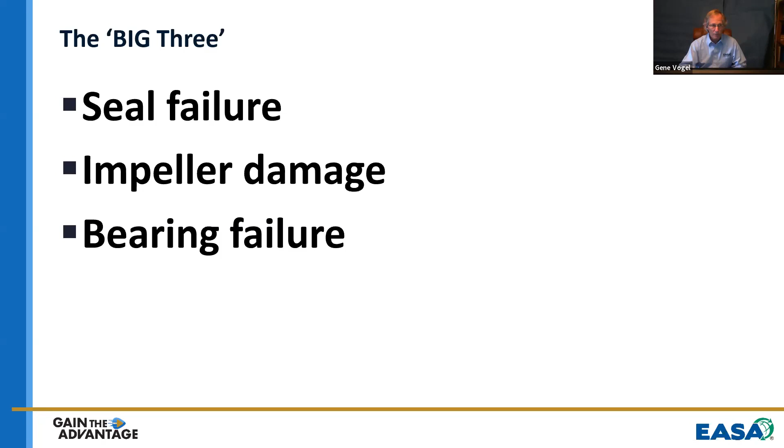I'm going to take somewhat of an outlined approach to this, giving it a categorical, methodical approach, which should make it clear for those who are new and for those who've seen this before in bits and pieces. The first one we're going to talk about is mechanical seals.

A mechanical seal is a fairly simple device. Let me illustrate this for you. I'll hold this up to the camera so you can see it. Here's the mechanical seal: you've got a stationary element and a rotating element, and each of them has a precision face which mate together. The stationary element stays still, the rotating one rotates, and a spring applies pressure. Pretty simple concept.

Here's this, if you took this seal and cut it in half, you'd want to go back to the presentation. You need to share your screen again. Did I stop sharing it? I stopped it for you. Thank you. Share screen, and share. There we go.

Back online. So if you took that seal and cut it right in half, you've got kind of a diagram here. And I want to illustrate, if you want to understand how seals fail, it's important to understand how seals work. There are the primary seal and secondary seals. The primary seal is where those two faces rub against each other. The secondary seals are the elastomers that seal the rotating element to the shaft and seal the stationary element to the housing of the pump.

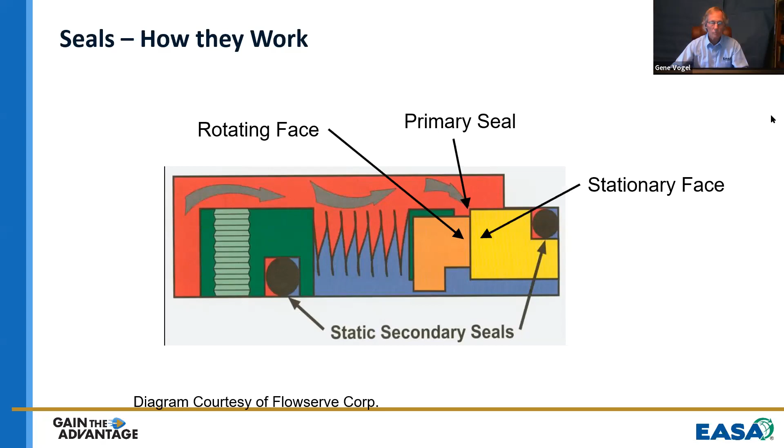The stationary seat right here keeps the pumpage from finding its way out underneath between the shaft and the rotating element, and the stationary element keeps that liquid from finding its way out on that side, and that's your secondary seal.

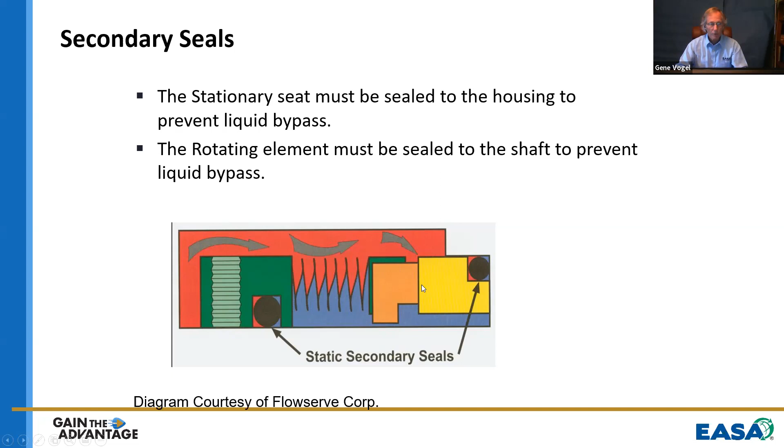Okay, so operation of the seal, there's a couple things that aren't quite so obvious. This is your primary seal, the rotating element right here. This is the rotating element, and it has a precision face. This is a stationary element with a precision face.

There's going to be a very, very tiny, small amount of the pumpage that gets in between those faces, and that's critical. That liquid between those faces significantly reduces the coefficient of friction between them, which reduces the heat generation.

So if you've got a very thin film of pumpage in between those faces and you're rubbing together and generating some heat, some of that's going to vaporize, and there'll be a very, very tiny amount, a few molecules. It's not measurable. You can't smell it. The EPA can come along with a sniffer and they can pick that up, but that's the only way you can tell it. So it's not visible, you can't see it, but it'll be a very small amount.

Now that's an important part of the operation of the seal because it reduces that friction, it reduces the heat that's generated. The other aspect of this is notice that the surface of the rotating element and some of the surface of the stationary element is exposed to the pumpage. The pumpage is actually going to take that heat through convection off of those elements and prevent them from overheating.

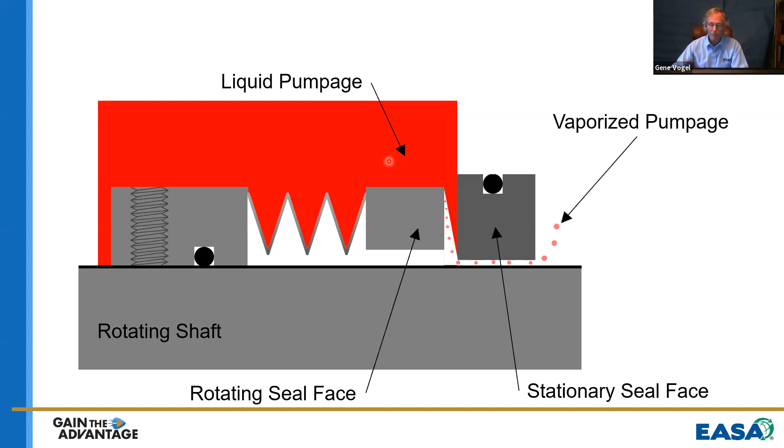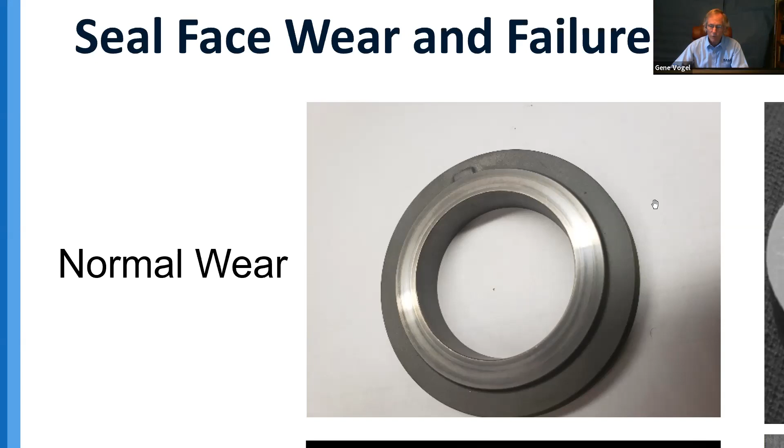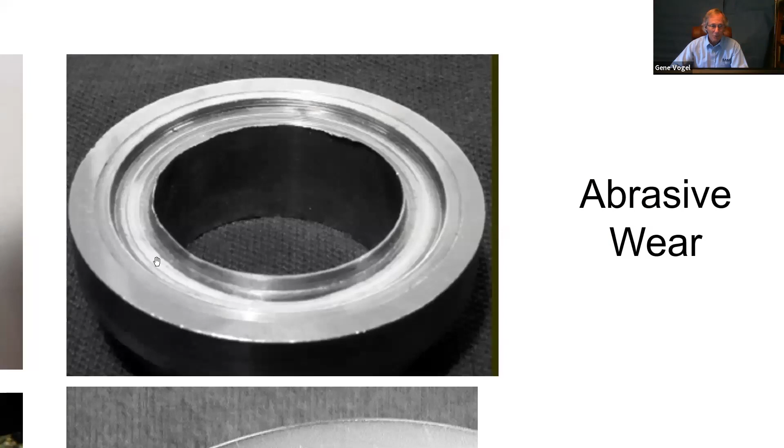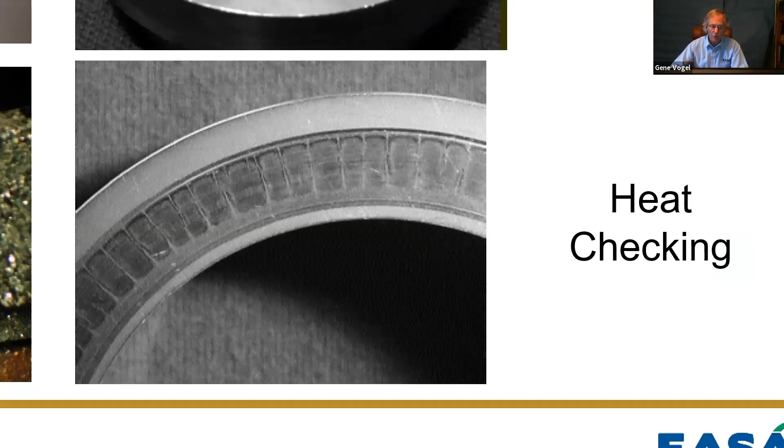And this is what we call heat checking. That's a particular pattern that shows up when a seal has been overheated, particularly if it's been run with too much tension on the spring.

So you can analyze the seal by looking at the seal faces. There's more to it than what I'm showing you here. There's 4 common examples. There's about a half a dozen more that I could show you.

We'll limit that to say that as far as the primary seal, if you have a seal that's leaking, why does it leak? Take a look at the seal faces and see, is there any damage there that would indicate why the seal had leaked? If there's no indication of damage to the seals, it says, gee, the seal looks good.

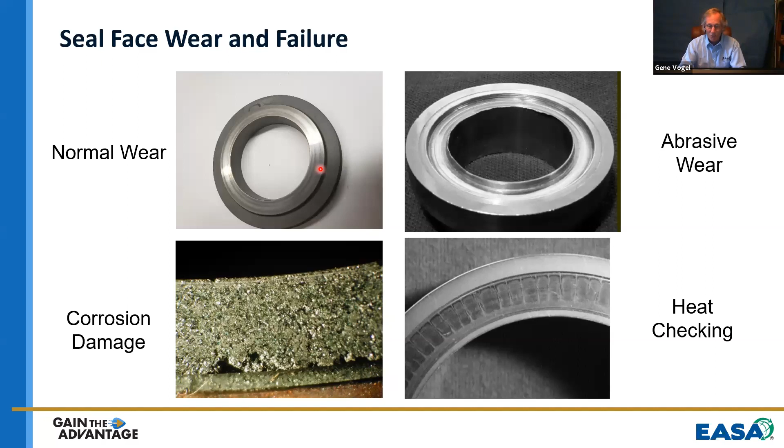I had one member who had changed the seal out 4 times. I said, what do the seals look like? He said, they look great. I said, well, the problem's not the seal. It's somewhere else. One of the other places you look is at the secondary seal.

These are the elastomers that seal, in this case, this is an O-ring that could seal that stationary element into the housing. It might be an O-ring in the rotating element, sealing the rotating section onto the shaft.

A chemical attack, there's something about these O-ring material. It could be just Buna rubber and they're using some sort of solvents in the chemical they're pumping, and it absorbed some of those solvents. This smaller O-ring is the correct size. The larger O-ring should be the same size as the smaller, but it has swelled up and it'll be really spongy and soft. It will not seal. So that's a chemical attack.

Someone damaged this putting it on there. They slid this O-ring up over a shaft where there's a keyway, or over a shoulder in the shaft that had a sharp edge. There's ways you can prevent that from happening. Take a little Mylar paper, wrap it around the shaft to prevent that from happening.

This is the elastomer that seals the rotating element to the shaft, and you can see it's cracked and brittle from being overheated. These are different materials. There's some real expensive stuff out there, Kalrez, that they can make this out of.

There's others that will withstand the heat better. So if the material for the elastomers is not compatible, or it's been mishandled and misinstalled, that secondary seal will fail. So if the faces look good, look at the secondary seal. If the faces look good and the secondary seal looks good, you might want to look elsewhere.

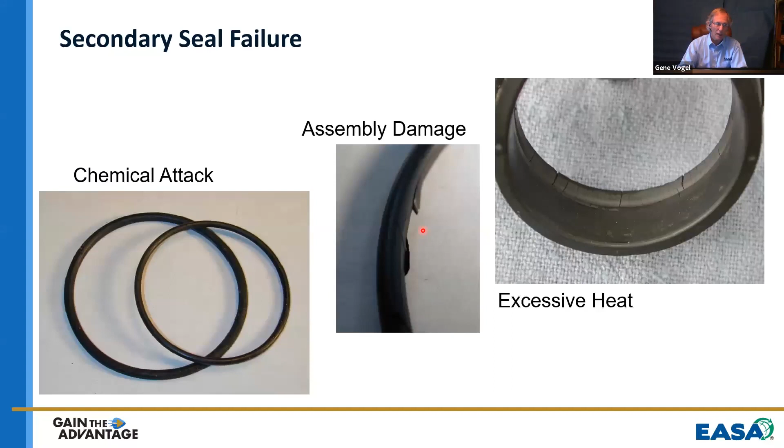The gentleman that I mentioned that had changed the seal out several times, they found there was a leaking valve, and the water was running down the pipe onto the pump and dripping off the bottom of the pump. They changed the seal out 4 times because the valve 3 feet away was leaking. Such are the things we encounter.

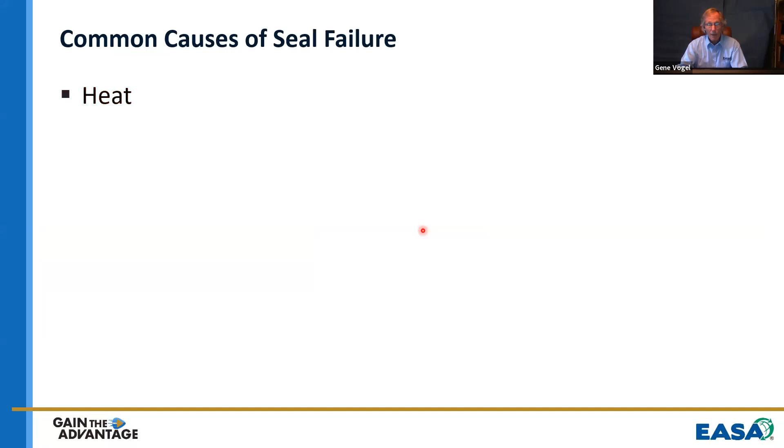So what commonly causes a seal to fail? Heat is a big one. A seal overheats. Abrasive pumpage, or pumping something that's got debris in it, gets between the seal faces—that's another common one. Vibration, improper assembly where it wasn't put together right, or chemical attack. Let's take each of these and break them down a little closer, okay?

The amount of heat that's generated is a function of the surface speed, the amount of force pressing the 2 seal faces together, and the friction coefficient of the face material. So those 3 things. The surface speed in turn is a function of how large the seal is, what's the overall diameter, how much surface area there is as a factor, and the rotating speed.

So if you've got a small seal on, say, a swimming pool pump, it's a 1/2-inch shaft, a 4-pole motor, runs at 1,800 RPM—the speed's not very high. You're not going to generate a lot of heat. That seal is not going to fail because of heat.

But if you've got a larger piece of machinery, maybe an industrial pump with a 3-inch shaft, a 2-pole motor running at 3,600 RPM, that surface speed's going to be a lot higher, with a bit more surface area as well. It's going to generate more heat.

The other thing is the amount of force being applied to those 2 seal faces, pushing them together. You've got to have enough force to keep the liquid from coming out. So if it's a low pressure system, your swimming pool pump for instance, there's not a lot of pressure there. You don't need a lot of tension on the seal faces. Without much tension, you're not going to generate a lot of heat.

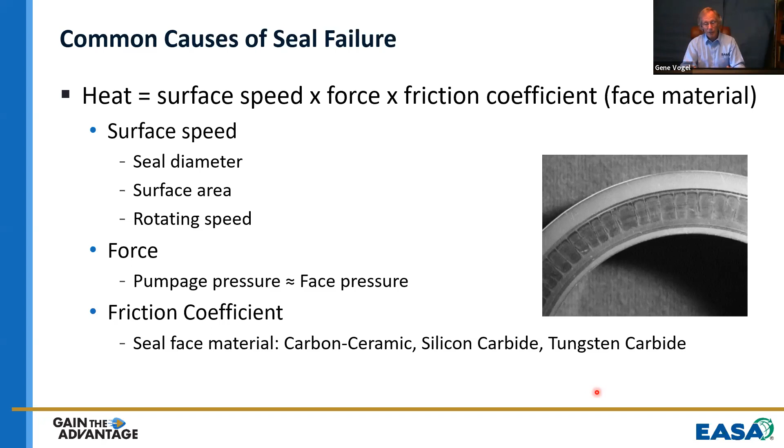The last factor is how much cooling do I have? The liquid, the pumpage, is actually flowing through—a small amount of it flows through the seal chamber and carries away the heat generated by the seal. If my pumpage is cool, like in a swimming pool pump, you're going to have great cooling and no problems.

If the pumpage is hot, a boiler feed water pump pumps condensate—a couple minutes ago that was steam, now it's hot water. You're not going to get as much cooling. Chemical applications in refineries may pump something like hot asphalt at 700 degrees. Not a whole lot of cooling going on there at 700 degrees.

So that's heat. Abrasion is the other thing that damages seal faces. The picture of the seal face here, ground right down into what's supposed to be a flat face, is because of abrasion in the pumpage.

How did I get there? That's what happens when you hit the wrong key. Please bear with me for a second. My end key apparently is right next to my page down key, and I hit the wrong one. There we go. Let's go with pumpage. There we go. Okay.

So the abrasives, suspended solids are the most common. You're pumping sewage, and you think you're pumping water out of a lake or a river, pretty clear, clean water. But there are very tiny particles in there from sand and other fish parts floating around in the water. I know there's fish parts, I've left some behind on occasion. So it gets in between the seal faces and grinds it up.

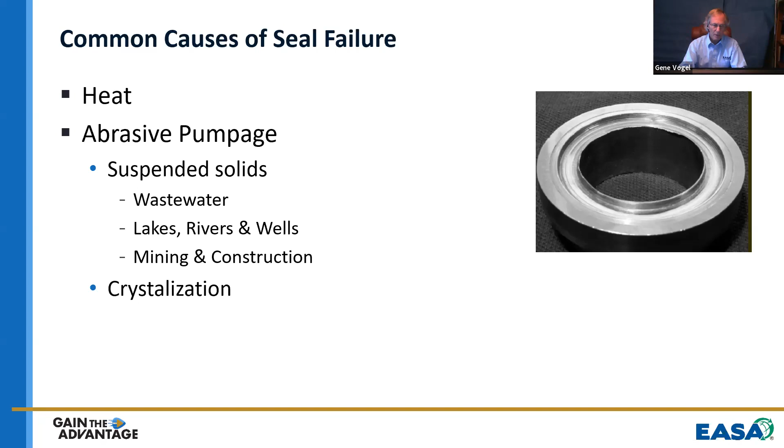Another source of abrasive pumpage is what we call crystallization. There's lots of different applications that have crystallization. I'll focus on one that's simple to understand - salt water. If you're pumping salt water and a small amount gets in between those seal faces, when the pump stops, you've got water and salt. The water evaporates, which means the salt forms a crystal. A crystal of salt is a pretty jagged looking thing, and that's what's in between your seal faces after the water evaporates. Then you start to pump up, and it grinds the faces.

So these are instances where your seal should be designed with something different than a carbon face, because carbon will get chewed up pretty quickly. Lots of other chemical applications can have crystallization.

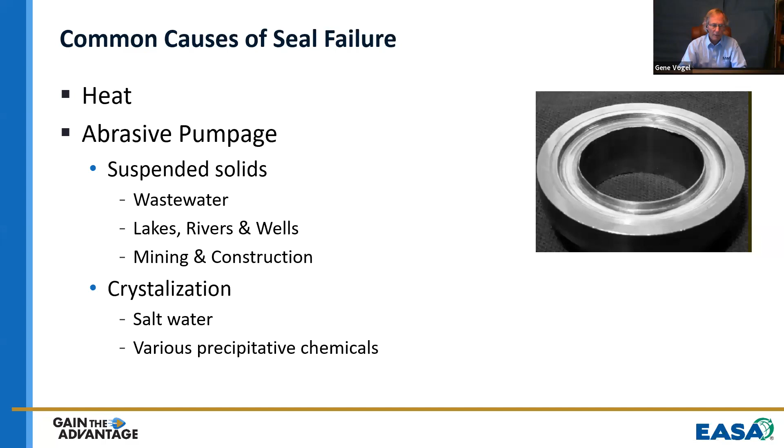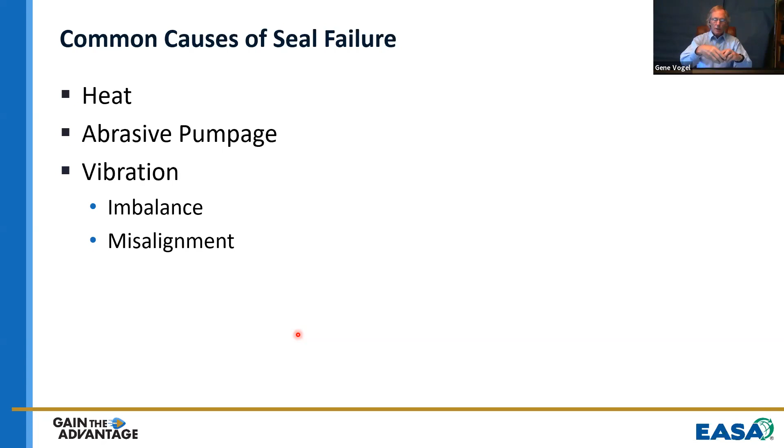Vibration is one of the things that causes seals to leak. The typical things that cause vibration: imbalance - the impeller can be out of balance, the motor could be out of balance, causing the whole thing to shake. Misalignment, not just of the motor with the pump, but also misalignment of the seal parts. If the stationary element of the seal isn't aligned properly with the rotating element, you're going to generate vibration. Cavitation is something that causes problems with seals, and it causes vibration, which causes the problem with the seal.

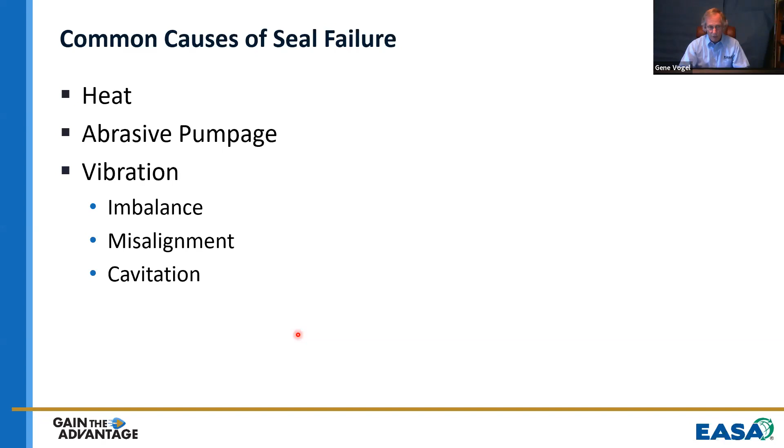We can talk a little bit about cavitation later when we get into impellers, show you a little more about that. So vibration is one of the reasons seals fail. Those seal faces are held together, but when things are vibrating and that seal starts to hop a little bit, the liquid will start blowing through there. One characteristic of a seal failure because of vibration is sometimes they'll stop the machine and restart it, and it'll quit leaking - until the vibration sets that seal off again and blows it open, and it starts leaking again.

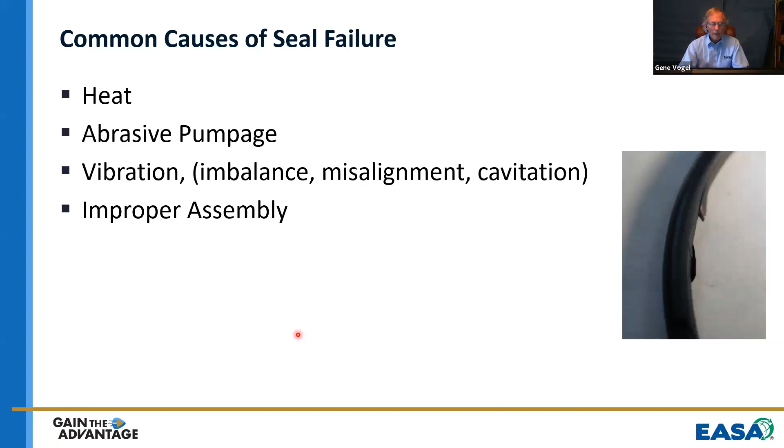Improper assembly - you can do things to a seal when you put it together that just make it fail. We showed you cut edges, sharp edges damaging an elastomer is fairly common. We've seen people slide the rotating element up, and it's got an O-ring inside, and they didn't put any substance on the shaft so it doesn't stick, and the O-ring will actually roll up. It twists up inside of the rotating element, and it won't seal like that.

So when you're installing elastomer parts that need to slide over a shaft or into a housing, one thing you don't want to use is grease, or in some cases oil, because it lubricates between the elastomer and the shaft. And it doesn't go away, it stays there. So now you start it up and the shaft is trying to twist this rotating element up to speed, and the shaft will spin inside of there because of the lubrication, and it'll start to wear and fret the shaft - it'll damage the shaft, okay?

Some of the seal manufacturers make special materials, some lubricants that are water soluble, used for water pump applications. A very good one that's easily available is KY Jelly. KY Jelly is a water-soluble lubricant.

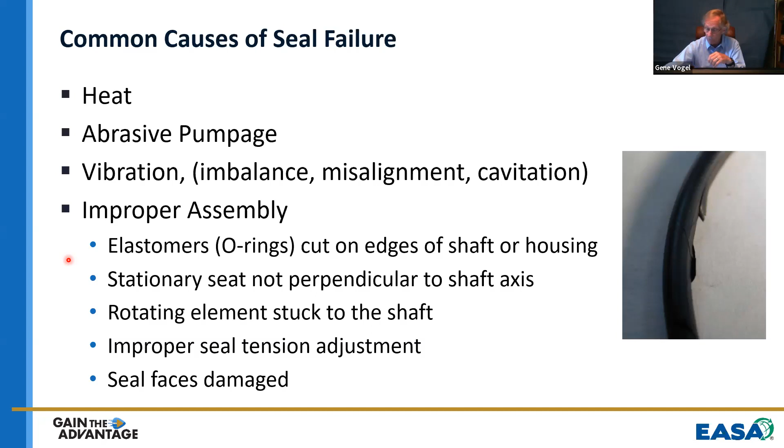And the seal faces can be damaged. These seal faces are very, very smooth, smoother than anything you can put on it in your service center. These are lapped on a lapping machine. A seal supplier who's a value-added seal supplier will likely have a lapping machine. You would never relap a small one like this, you just replace it. But if you've got a 3-inch or 4-inch seal, very expensive, they'll relap those surfaces.

So you need to be careful to preserve that smoothness. Keep the dirt off of them. You don't wipe them off with a shop towel or anything like that. You keep them clean. You can always rinse them off with some water. Okay.

Chemical attack is another common cause of problems - not so common, but it causes problems. And we showed you the instance of the seal face which has been corroded by the pumpage, and the O-ring which has been swelled up because of solvents in the pumpage. Okay.

All right, so that was a really quick run through on seals. Obviously we could spend probably half a day on seals, but to give you a little bit of an introduction of seals and how they fail, and just a couple pointers on how they don't fail.

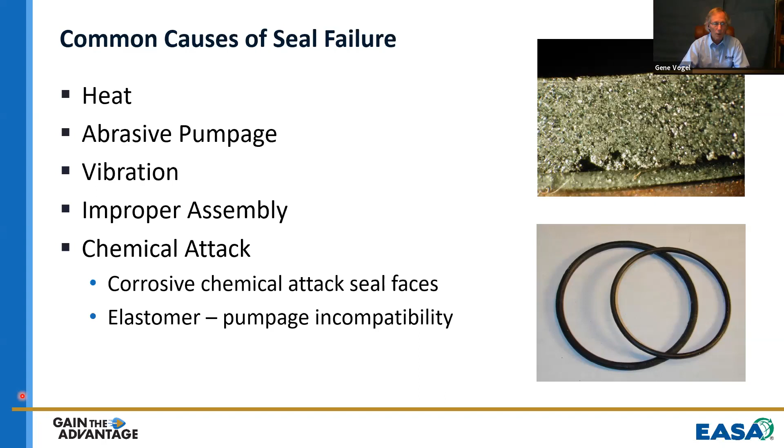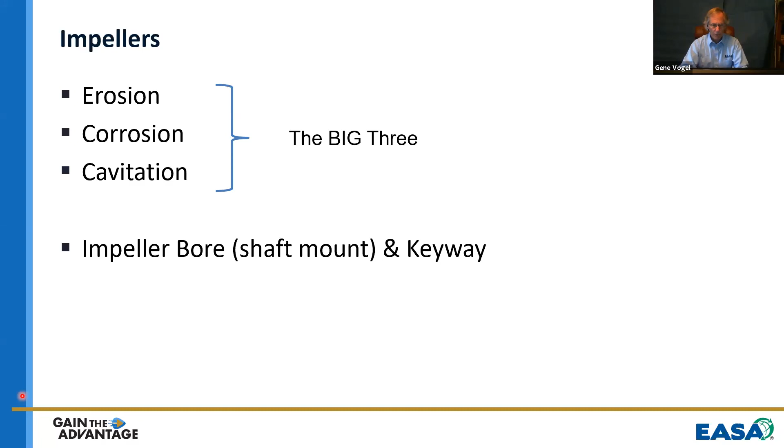Then the second one of the big three for why pumps fail is impellers. And the impeller, you think, God, that's a chunk of metal, how does it fail? Well, the big three on how the impeller fails are erosion, corrosion, and cavitation. And it's important to be able to recognize the difference between those three. The other problem we see with impellers is that they get loose on the shaft. They don't mount on the shaft properly, and the bore gets opened up and gets fretted and worn. So we'll look at those.

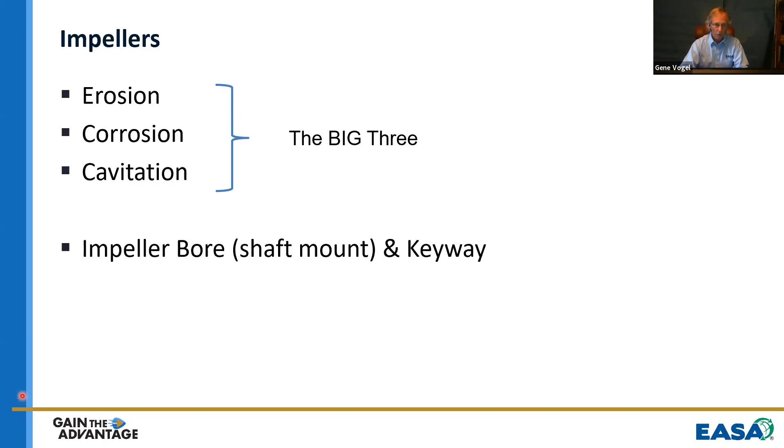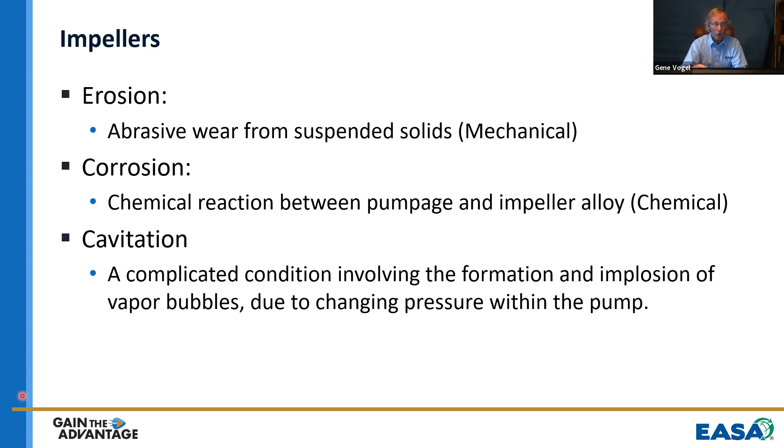Let's take a look at erosion and corrosion and cavitation. Erosion is a mechanical thing - there's something in the pumpage that actually wears against the impeller and sands it off like a piece of sandpaper. Corrosion is different. Corrosion is a chemical reaction between something in the pumpage that ionizes and combines with the molecules that are in the alloy of the metal that constitutes the impeller. Cavitation is erosion, but it's a fairly complex condition that occurs because bubbles form in the suction and then implode. I'll show you an illustration of that. So we need to be able to look at the differences.

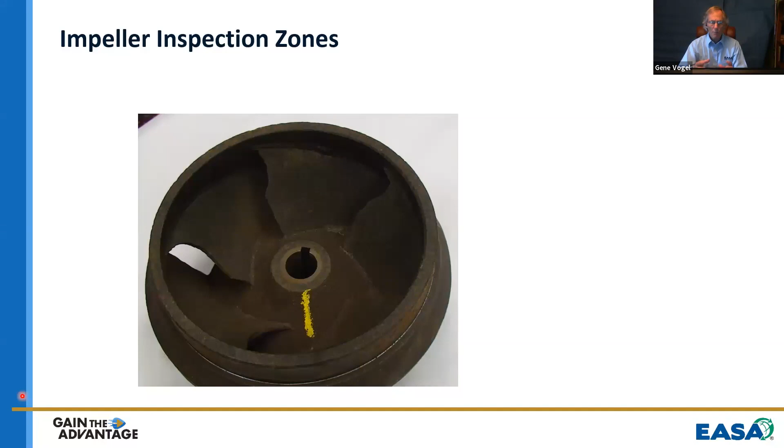To do that, think of the impeller as having different inspection zones - areas where I'm going to look at, specifically focus on, and see what's going on there.

One of them is the suction eye. What's going on in the suction eye of the impeller? And then you have the leading edge of the vanes, that's where they intersect with the liquid, the pumpage, and you can see a lot of what's going on at that point. You've got the vane passageway where the liquid goes from the vane out the back, so that vane passageway is another area that you look at.

You've got the wear ring on the outside that matches up with a wear ring. Not all impellers have that, but if it has one, it's certainly an area we need to pay attention to. It matches up with the casing ring and has a tight clearance. It's a clearance fit, doesn't touch, no wear, not rubbing against it, but it limits the flow from the low suction side of the impeller to the high pressure discharge side.

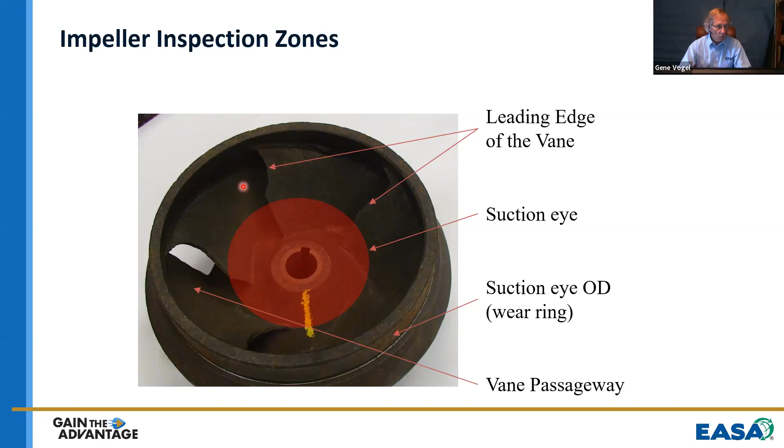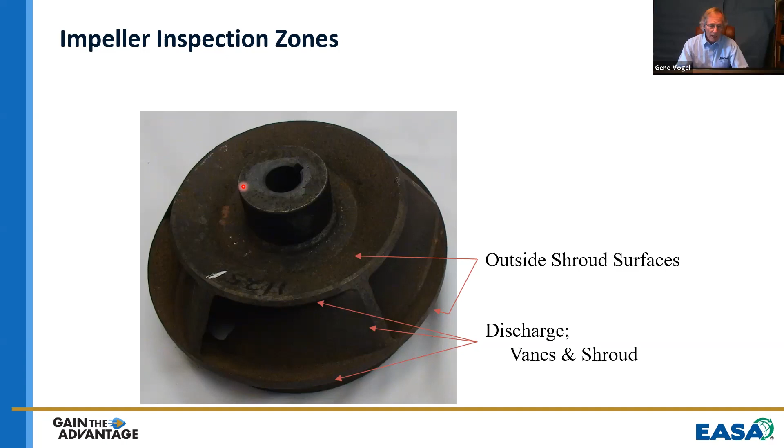Then you flip the impeller over on the back, and you have some inspection zones back here. You want to take a look at the outside shrouds, see if there's any damage. You want to look at the discharge area where the liquid leaves the back of the vane and the insides of the shroud. You've got the bore where the shaft mounts, and you've got the keyway. Those are all inspection zones and places you need to take a look at on the impeller, and that will help you assess what type of damage you have.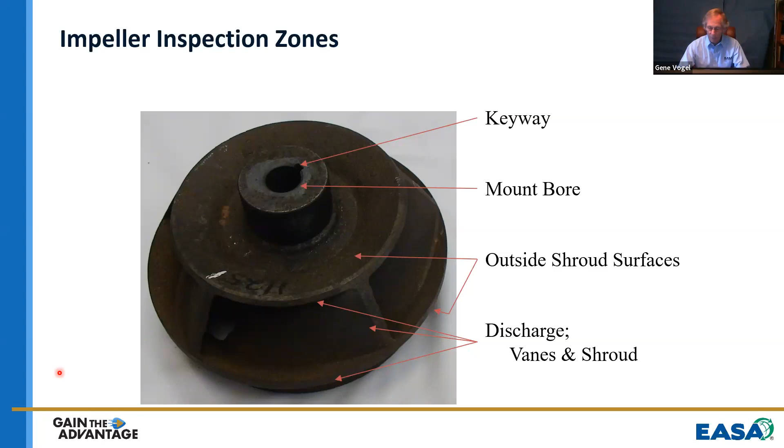Let's take a look at the difference between erosion and corrosion. Erosion is an abrasion, it's a mechanical process, it is not a chemical reaction. Corrosion is a chemical reaction. The erosion is highly affected by the flow velocity.

So if you look at the impeller in the places where the liquid is moving the fastest, at the leading edges of the vanes, across the working edges of the vanes, you're going to see more damage there. In corrosion, it's somewhat affected by the flow velocity because you've got a chemical reaction going on. If you throw more chemicals against the alloy in one particular place than another, you're going to get a little bit more corrosion, but it's not nearly as pronounced as it is with erosion.

Erosion usually affects most of the exposed surfaces. It affects the surfaces where the flow velocity is high much more than other surfaces, but usually if there's some sort of abrasive material in the pumpage, it affects most of the surfaces somewhat. With corrosion, it affects all of the surfaces wherever the pumpage is in contact with the impeller. That's one of the key tip-offs between whether it's erosion or corrosion. See if all of the surfaces are affected. If it is, it's likely corrosion.

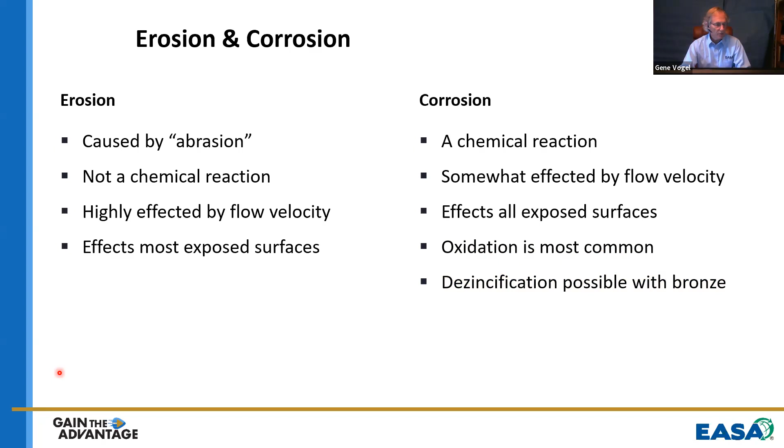First, here's erosion. Notice the furrowing. Can you see these furrows down in here where it looks like somebody got in there with a die grinder? It's not a die grinder, that's the abrasives in the pumpage. It's cut grooves into the back of the vane even, and it's cut through the sides of the shrouds from the inside out. From the outside in, it doesn't look too bad, but from the inside out, you can see that it's worn. That's abrasive wear.

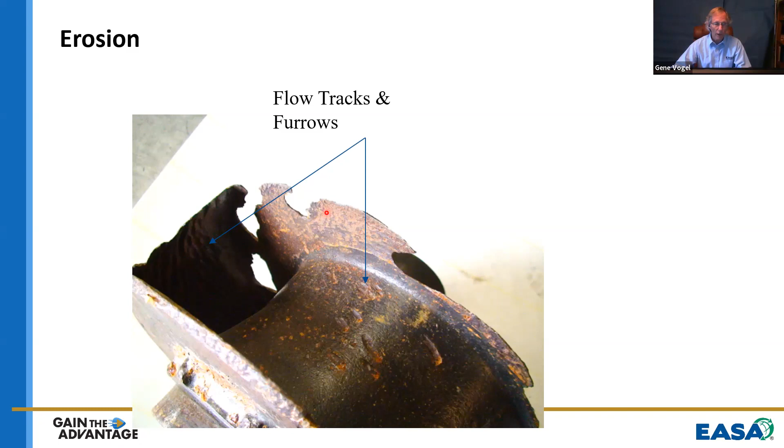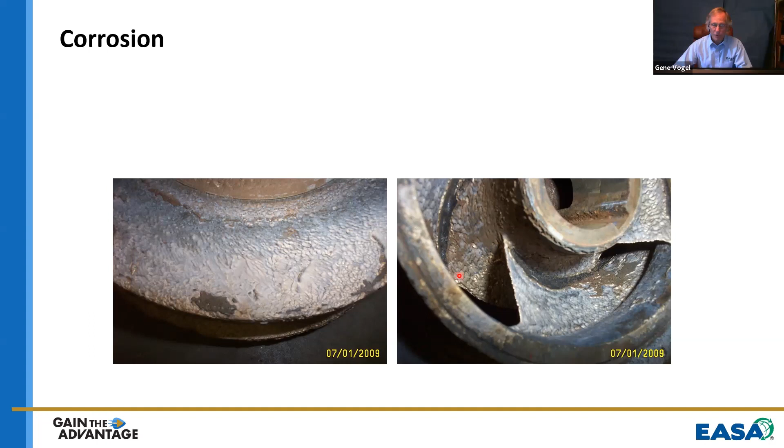That's abrasive wear, abrasion. Corrosion, on the other hand, affects all of the surfaces. Look at the surfaces even on the outside of the impeller. This is not a high velocity area out here, and yet look at the surfaces and how everything on there all shows evidence of the damage. That's corrosion damage. Where's the only part on the impeller that doesn't have it? The shoulder, where it's shouldered up against the shaft or up against the retaining nut in this case.

And that's because the liquid isn't there, the metal is touching it and keeping the liquid away from it, so there's no corrosion. That's a key tip-off to corrosion damage. When that face right here is unaffected and all the rest of it is affected, it likely is corrosion damage. Here's a bronze impeller that's been just about dissolved.

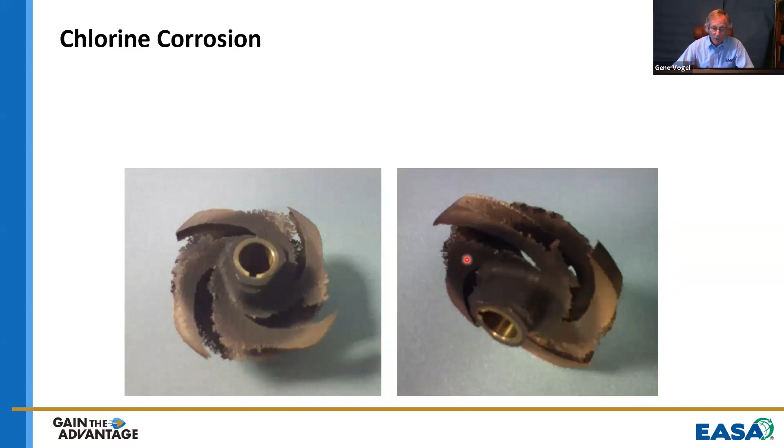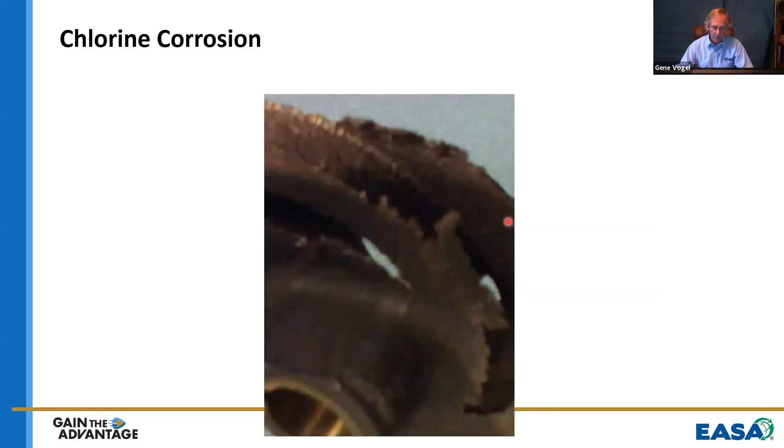Notice, look where there's no damage, right there on that shoulder. That damage came in from the outside in and from the inside out, and pretty much dissolved the impeller. This was chlorine corrosion, but there are other types of corrosion that can occur.

One particular one I want to focus on is dezincification. Bronze is a combination of zinc, lead, copper, and other alloys, but zinc is an important one. Certain chemicals, chlorine being one of them, dissolve the zinc and get into it and start eating it away. The tip-off is this reddish color. When you've got an impeller with reddish corrosion damage, that's probably dezincification.

They make bronze alloys that do not have zinc in them. So if you run across an impeller that looks like that and it's going to have to be replaced, you'll want to alert your customer and say, look, you've got dezincification going on here. You're going to have to buy a more expensive impeller, at least a more expensive alloy without zinc in it, or it's going to continue to deteriorate like this.

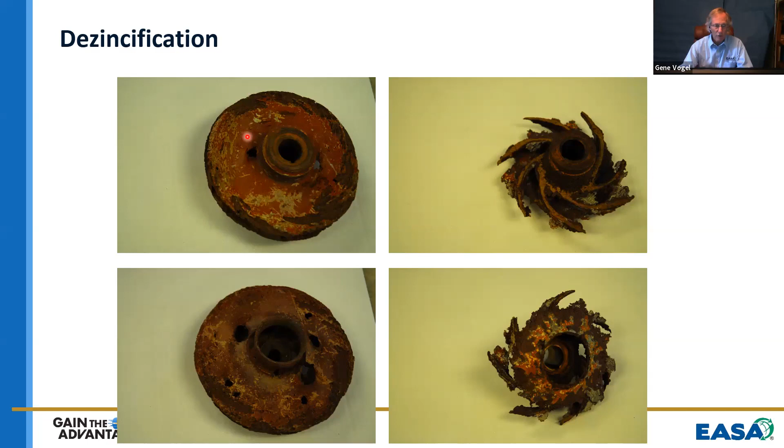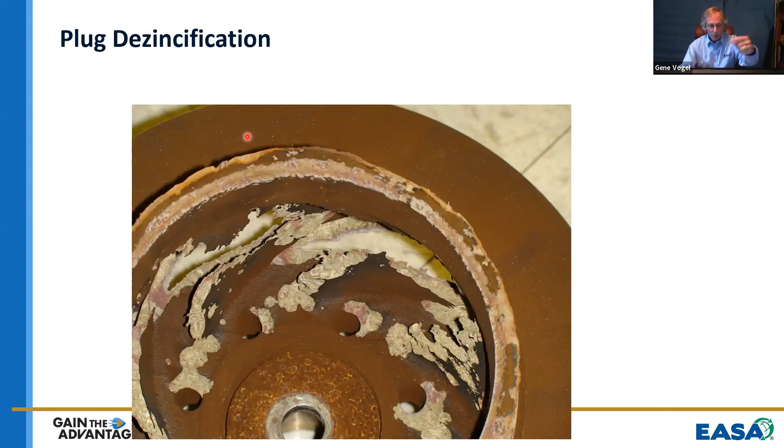The red is because the copper in the alloy is the red color, and it shows up once the zinc is gone. There's a special type of dezincification called plug dezincification. It looks like a worm got in there and started digging holes in it. Once it gets started in one particular area, it just corrodes and eats and eats, and once it gets down into some zinc it keeps going, leaving little holes ground all through it. It looks a bit like furrowing, but it doesn't follow the flow path—it follows strange patterns. The real tip-off is the reddish color. See the reddish color? That's the copper coming through when the zinc is gone. So dezincification is a form of corrosion.

Another aspect of impeller damage is cavitation. It's pretty common on pumps. Cavitation is erosion, but it's caused by air bubbles, or vapor bubbles if you want to get more technical. You take a bottle of 7-Up or ginger ale, take the lid off, and the pressure drops—the bubbles come out. So a reduction in pressure allows bubbles to form.

The bubbles form in the suction of the impeller—that's the lowest pressure area, where it's sucking the liquid in. As the liquid goes through the impeller, it builds up pressure. As pressure builds up on the air bubble or vapor bubble that's come in there, it finally gets to a point it can't take anymore, and it implodes—not explodes, implodes. When it implodes, the liquid comes in with tremendous velocity and actually erodes a little bit off of that impeller.

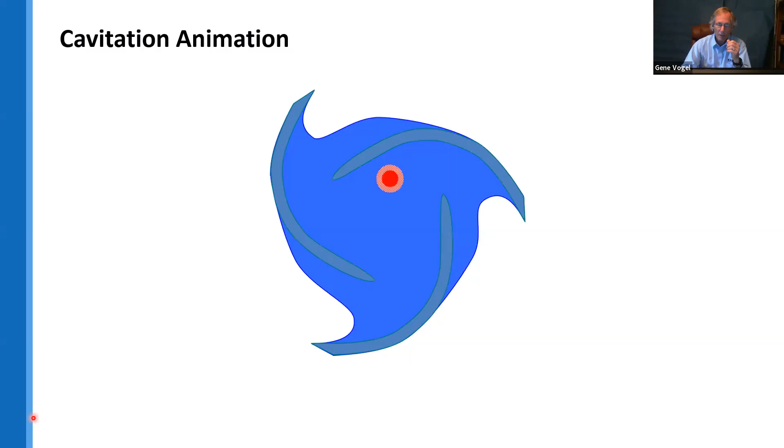You can take a pressure washer and put it on your driveway trying to get a grease spot out—holy cow, you get a hole. It will eat right through concrete, and it'll eat right into the brittle surfaces of a cast impeller.

We got a question: is hard water considered erosion or corrosion? Hard water is a chemical condition of the water itself and has very little effect on the impeller. It doesn't erode impellers or any pump parts. It has minerals suspended in it, but at the molecular level, not the particle level. Hard water will cause deposits where it's allowed to sit—your water heater fills up with crud because of the hard water. When you heat it up, those chemicals tend to precipitate out of the water. So the answer is no—hard water does not cause corrosion, does not cause erosion.

Another quick question: which material would you recommend to recover the impeller if it presents some holes? This impeller, as displayed here, will be repaired, and depending on what is being pumped, they'll probably use some sort of ceramic epoxy. There are a number of manufacturers—if you contact me offline, we actually did a whole webinar on this a number of years ago. You can coat the impeller with these products and restore it. This impeller should not be reinstalled the way it is, because once cavitation damage or any type of erosion damage starts, the roughness of the surface accentuates and makes further erosion even worse, since velocities get higher over the rough surface.

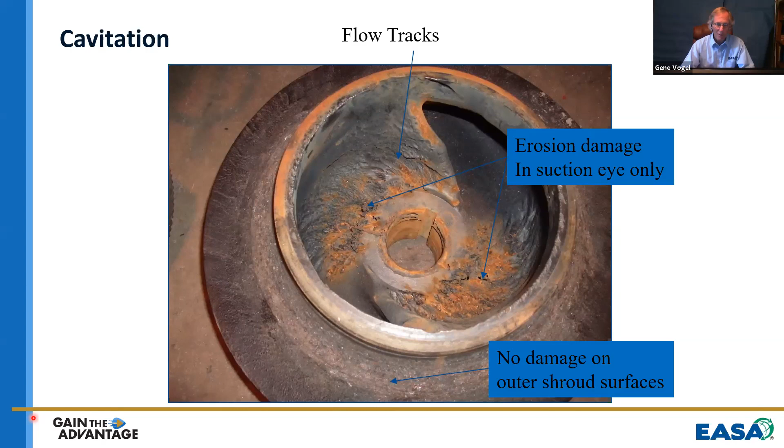In severe cases, some people where the impeller couldn't be replaced, they've welded it and then coated it. So that repair process is a topic we could spend quite a bit of time on. I hope that answered your question.

Better picture, same thing. Oh, incidentally, somebody's going to look at this and say, well, I could see this same thing if this was pumping sand and gravel and rocks, right? Isn't that the same kind of damage you get? Yes, it's erosion damage, but look right here. Notice that it stops. It stops right there, and over here, it stops right there. If that were rocks and sand and gravel, wouldn't that damage continue on up through the vane passageway? Why would it stop abruptly right here?

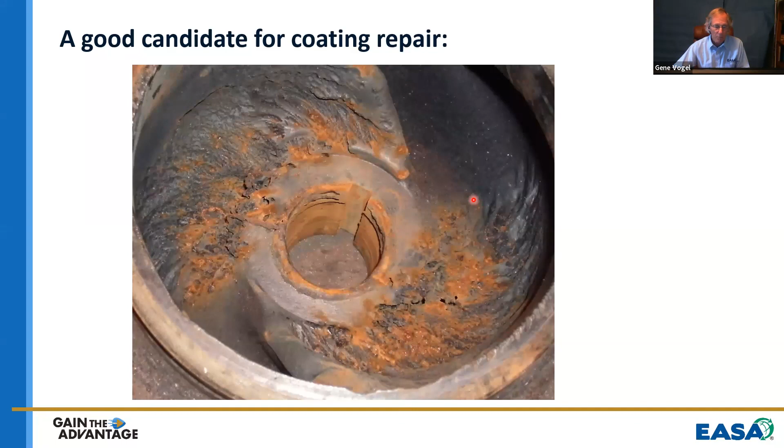That's where the pressure got high enough for all of the bubbles to have imploded and done their damage, and now they're just liquid and they go right through, and there's no more damage. That is the key tip-off to cavitation. It's localized and it just stops at some point. On this impeller, it stopped further up. Actually, until it got up to high enough pressure for all the bubbles to implode, it was almost out of the impeller. It just depends on the pressure balance and what's going on with the impeller.

Cavitation, one of those top subjects we could spend quite a bit of time on, but in terms of why pumps fail, cavitation damages the impeller.

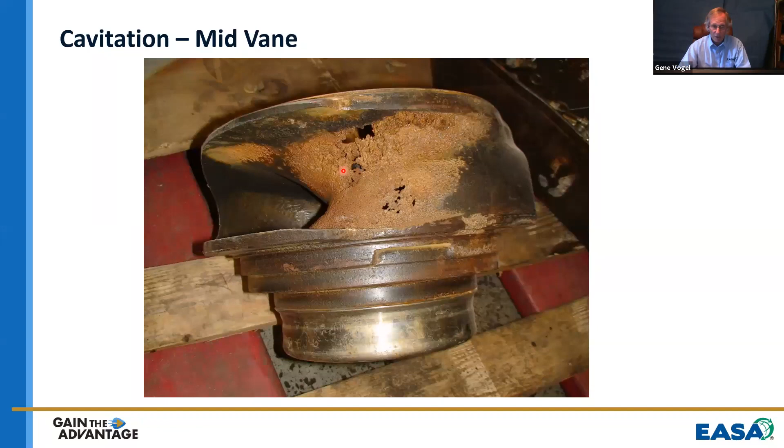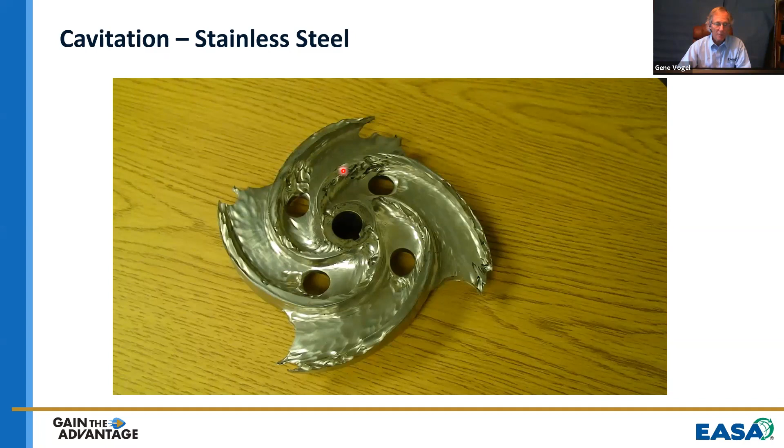There's a stainless steel impeller damaged by cavitation. Looks like somebody got in with a little ball peen hammer and beat on it. You know, stainless is tough, it doesn't erode the same way, but a little different appearance, still cavitation damage.

The last portion of the impeller I want to take a look at today is the impeller bore, the fit to the shaft. Usually an impeller fit to the shaft is either a clearance or a transitional fit, so it may slide on and off easily. That doesn't mean there's something wrong with the bore. If it slides on and off easily, oh, we need to make it tighter - not necessarily. What you need to look for are signs of fretting, signs of wear. If there's no wear and the shaft is fairly smooth, no wear on it, the bore of the impeller is smooth, the key looks good, it hasn't been working and wearing, then that's just fine. That's the way it's supposed to be.

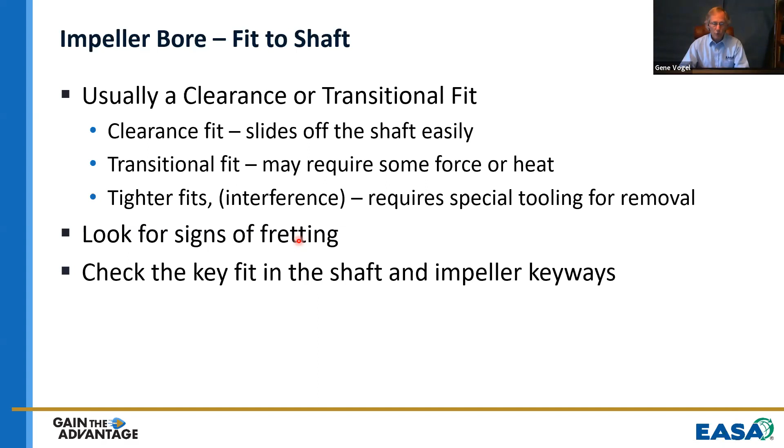Check the fit of the key in the shaft and in the impeller. If the key is loose, that's trouble for an impeller. When a key gets loose, you can break an impeller. This worked and worked and worked and worked until it just took a chunk out of the side of the impeller because that key was loose in there.

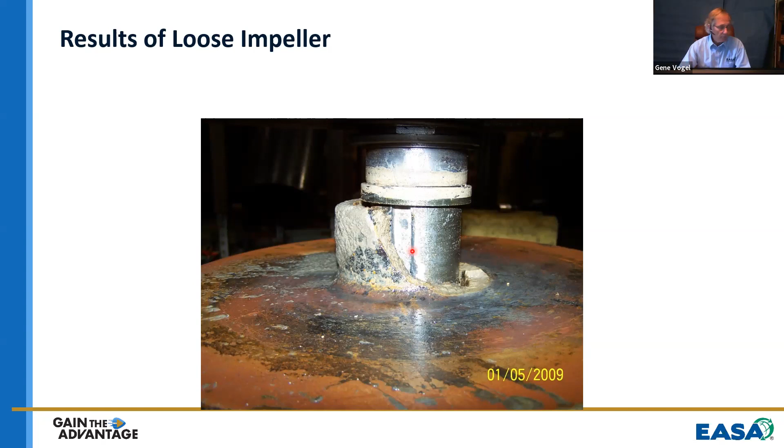Oh my gosh, look at that. That key worked and worked and it just broke a piece off of the impeller. That's what happens when you get a loose key in an impeller.

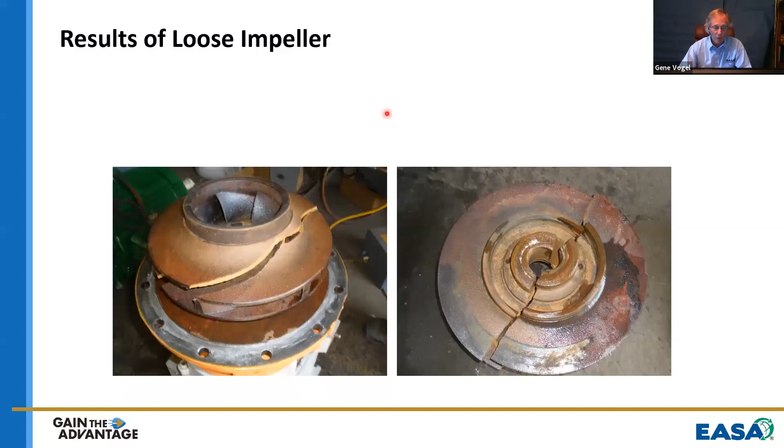Okay, so that's an important thing to inspect. You want to look for the fit. Loose fit is not necessarily bad - look for the wear.

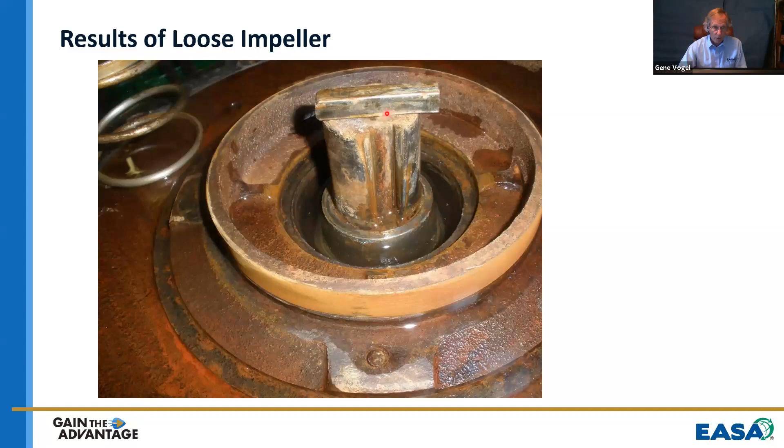So that's impellers. The third element that we take a look at of the big three that cause pumps to fail are bearings. Now, we don't want to do a complete root cause failure analysis presentation here in 10 minutes on bearings, so we're going to focus on those types of bearing failures that are peculiar or unique to pumps, okay, whether it's sleeve bearings or roller type bearings.

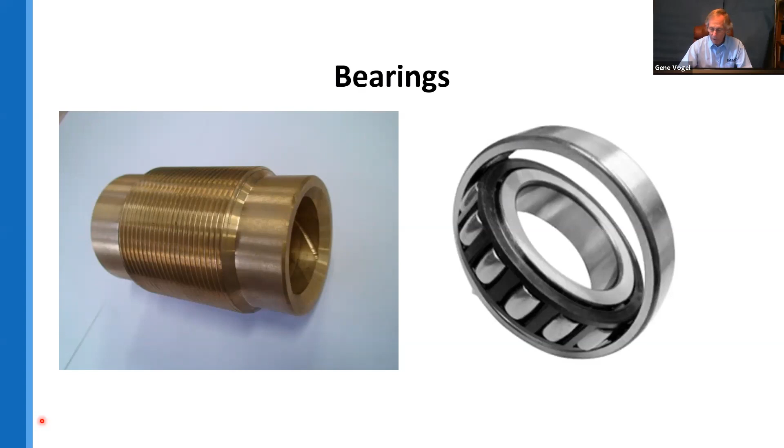These are the ones we'll take a look at. One of the reasons bearings fail on pumps is contamination from the pumpage. We have thrust balancing issues on pumps that can apply high axial thrust to a bearing and cause it to fail. On vertical turbine pumps, your bowl bearings and column bearings are subject to erosion and are poorly lubricated. Also on vertical turbine pumps, the ball bearings in the motor, which aren't technically part of the pump but are integral to the operation of the machine, can be subject to upthrust. So we need to be aware of what an upthrust is from a pump. Those are the issues we'll talk about regarding bearing failures unique to pumps.

Contamination from the pumpage. Pumps are a wet environment. It's likely that if you're pumping water, sewage, or chemicals, some of that material is going to find its way up into the bearings, whether that bearing is in the pump or in the motor or whatever else could be driving it.

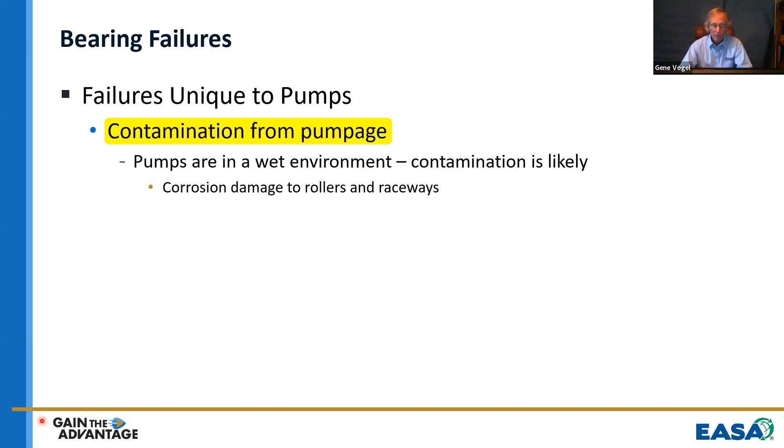The corrosion damage will be seen on the rollers and in the raceways. To see that, you've got to take the bearing apart. Many service centers have a routine bearing inspection for any machine that comes in. They cut the bearings apart, look at the races, get a magnifying glass out, at least, if not a microscope, and look at those raceways, balls and rollers to see if there's any damage. One of the types of damage you're looking for is corrosion. Corrosion has a different appearance than false Brinelling, spalling, or other things that cause a bearing to fail. So looking for corrosion is an important element in inspecting bearings from pumps.

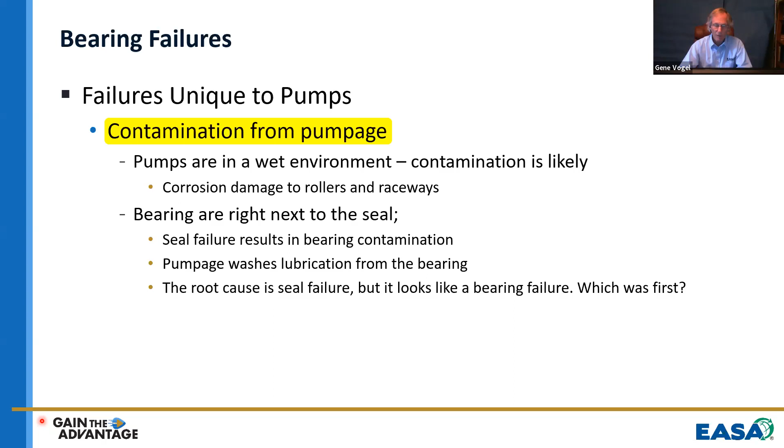The bearings are right next to the seal. The seal fails, the liquid comes out, washes back up into the bearing, washes the lubrication out of the bearing, and then the bearing fails. When you're trying to do root cause failure analysis and you've got a bad bearing and a seal that's failed, which came first? Did the seal fail and wash out the bearing, causing it to fail? Or did the bearing fail first? If the bearing fails, what are the chances the seal keeps functioning properly? You're probably going to have the seal leak as soon as the bearing starts to fail. It can be difficult to tell which came first—there's no set way for it. So that's one of the dilemmas you'll encounter repairing pumps and trying to figure out why it failed.

Impellers suck liquid into the suction eye. Some impellers have two suction eyes and suck from both sides, which is good because they don't get any axial thrust. But a large number of pumps simply have suction on one side, and if you're sucking liquid in on one side, there has to be an equal and opposite reaction force in the other direction—it pulls that shaft up towards the pump. You may take a look at some of the bearings that come out of a pump and see evidence of high axial force, which could be because some function of the pump meant to control that axial force has failed.

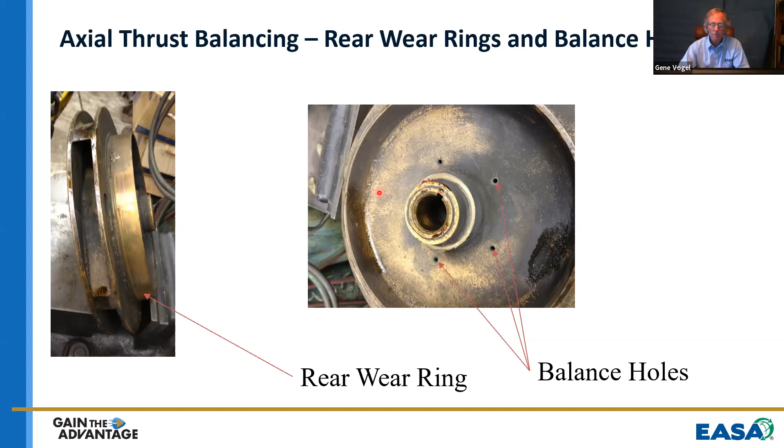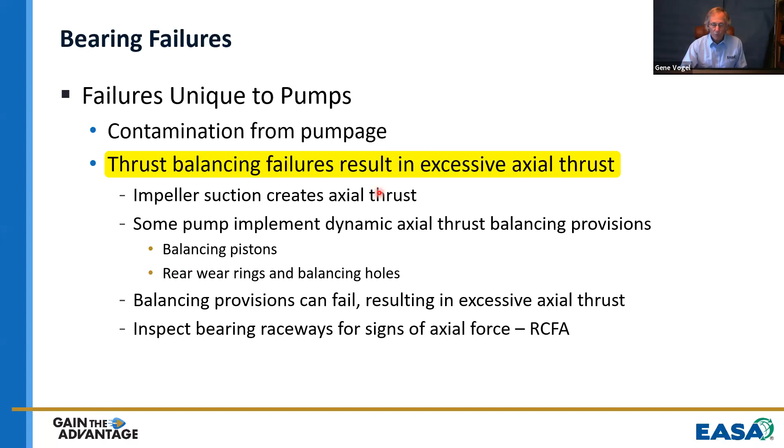Vertical turbine pumps have sleeve bearings that go down the column, and they have sleeve bearings in the pump bowls themselves. Most of these sleeve bearings are lubricated by the pumpage. So if you're pumping water, it's not a real good lubricant, and it's got abrasives in it because it's coming out of a well, or a river or a lake.

Those bearings don't get lubrication, and that's the weak point of vertical turbine pumps. In fact, the one that fails most often is the one way up at the top, just below the seal, especially in a deep well application. That pump turns on and might run for several minutes before it pulls the liquid out, possibly from 200, 300, or 400 feet deep, up to the discharge. Meanwhile, the bearings at the top are running dry, and they probably have abrasive left in them from the last time the pump ran and shut down, with the water evaporated but abrasives still in there. That's a classic failure mode for these types of pumps.

You can do some analysis on these bearings. Other things that cause bearing failure: if a bearing is eccentric, not in the middle, when you assemble the pump and bolt things together, the bearings are pressed in. If somebody hasn't taken time to ensure the connecting rabbets are concentric and perpendicular, your bearings will be misaligned with each other, causing excessive bearing wear. So if you look at bearing wear and it's worn on one side, that usually means the bearing is not true to the other bearings in the machine.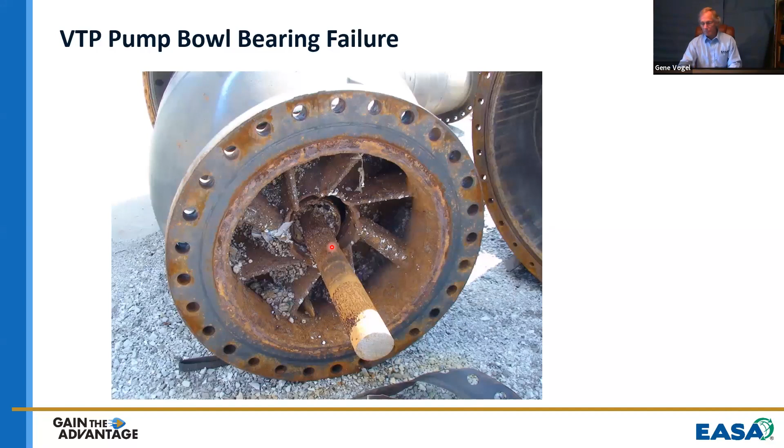So that's vertical turbine pumps and the bearings in them. Upthrust is an issue that needs to be understood if you're going to work on pumps. We would expect a vertical pump to have downward force to lift the liquid up, but there are particular times, especially at shutdown momentarily, and then at high flow rates for continuous periods, where the actual force on the pump shaft is up, not down.

To understand that, you'd have to look at the reaction forces of what goes on and how the water is lifted. I pulled these slides out of another presentation where we talked about that. In fact, I did a paper on this that you might want to look up. At high flow rates, 130% of capacity, your thrust becomes negative.

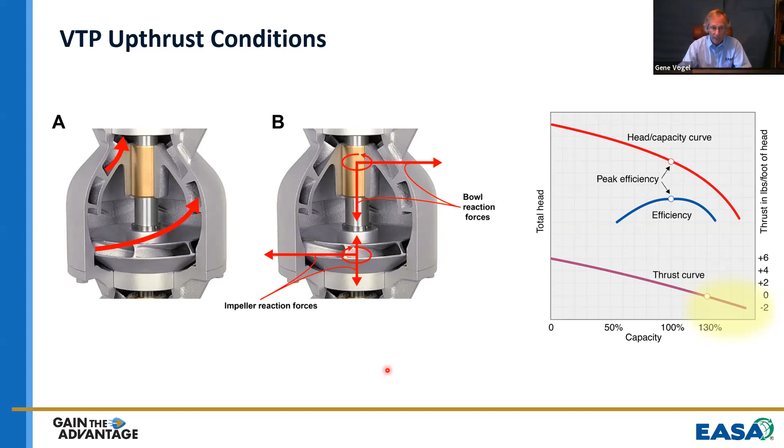Negative thrust on a pump means up thrust; normal, positive thrust is down. If you're going to have upthrust on these pumps, and the motor is an integral part of this machine, the pump can't operate by itself. The pump shaft actually hangs on the motor shaft, so the motor bearings are what must control the upthrust. That calls for angular contact bearings configured either back to back or face to face, or some special provision that will handle upthrust. Two tandem bearings, or any single bearing on top, is going to be configured for downthrust. So you have to consider upthrust as and how the bearings are oriented, as the bearings in the motor support the pump.

That's another subject that requires a little more discussion than we have time for here. There is a paper available for that - I believe it was a Currents article a couple months ago. So look up the EASA Currents article on upthrust if that's something you're wondering about.

Well, I hope we've covered what causes pumps to fail. We've left a few minutes here at the end for a little bit of questions if we have them.

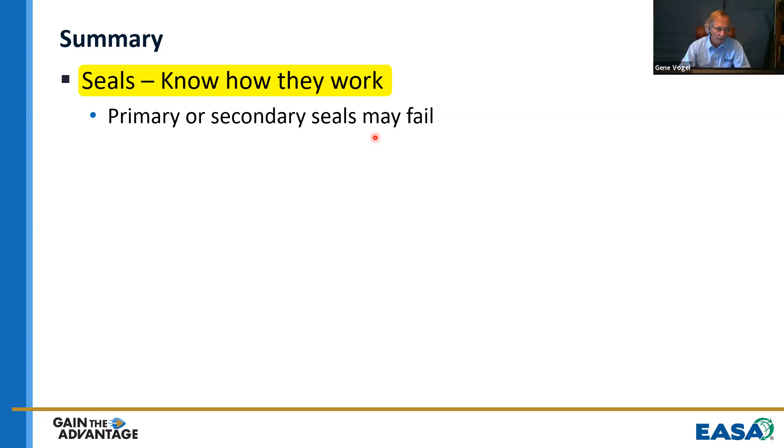Seals fail on pumps, and you have to know how they work to know how they fail. Primary and secondary seals might fail, so inspect the seal and see if there's any damage to the seal faces. Those look good - well, what do the secondary seals look like? What does the housing or shaft look like where that secondary seal mounts? Heat, abrasion, vibration, improper assembly, and chemical attack are the things that cause seals to fail.

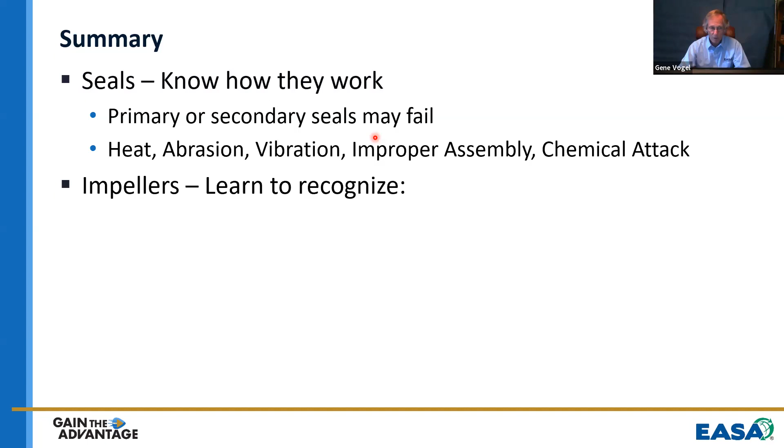With impellers, we need to be able to recognize erosion, corrosion, and cavitation. To do that, we look at impellers in different inspection zones and make sure we understand what all the damage is in each zone. We also need to look at the shaft and the keyway.

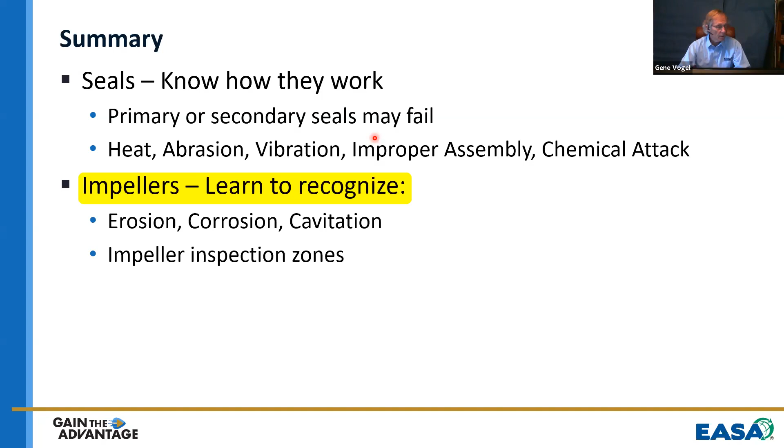With bearings, we apply our root cause failure analysis techniques. We cut the bearings apart if they're ball or roller bearings. We do a good careful inspection of the sleeve bearings and see if we can determine the type of failure mode.

Pumpage and corrosion damage are common with pumps, because it's all around - it's in the bearing. The vertical turbine pump bearings, you can take a look at and see how they have worn. Suction, thrust, and upthrust are unique to pumps - you don't have those on a lot of other machines. You have them on gear cases, with helical gears, but not on all the other types of machines we might work on. So thrust is something that needs to be considered.

Ready for a couple questions?

Yeah, first one is: any difference between application for a face-to-face versus a back-to-back thrust bearing?

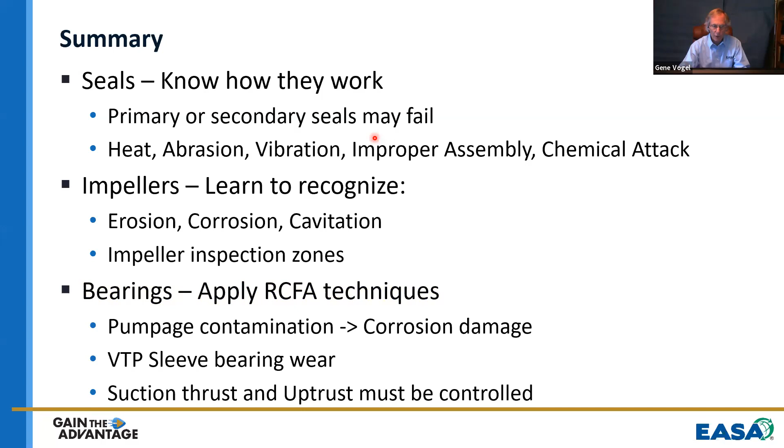The applications - the answer... do I need to repeat the question? Did you hear the question, or shall I repeat it? I can read it again. Yeah, okay, let me get my slides going here. There we go - okay, so I need to go to, where's my slide?

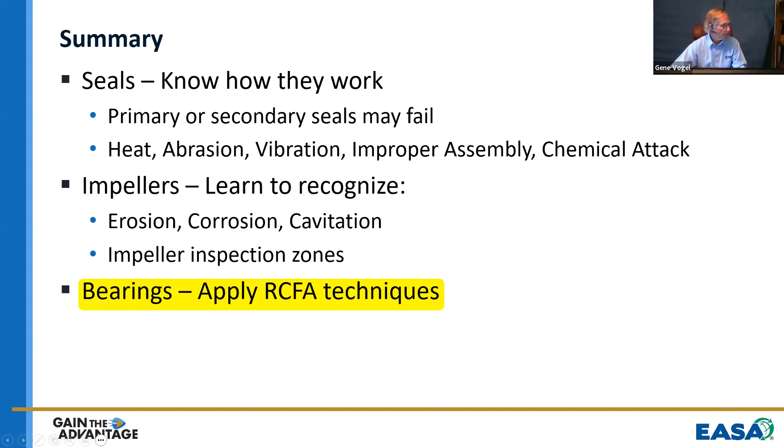There it is, had to find it. Okay, so back-to-back or face-to-face. With back-to-back, it's this upper bearing which is taking the downthrust, and the lower bearing is configured for upthrust. If I took this top bearing and slipped it around and underneath the bottom, or if I flipped them both over, then I'd have face-to-face. The application really doesn't care - what makes a difference is how the particular bearing housing is designed and how the shaft is designed.

Since we're going to control both upthrust and downthrust, both the inner races and the outer races must be retained. Otherwise, the upthrust would push the shaft out of the bearings, or the upthrust would push the bearings up out of the housing, or vice versa. So they've got to be retaining on both sides.

The difference is that one pair of these, either inner or outer, need to be clamped, not just retained, but clamped, so that you set the proper internal clearance or preload, as the case may be. If you've got a snap ring on the shaft, it can't clamp the inner races together. So if there's a snap ring on the shaft, they should be face to face, meaning the outer races need to be clamped together. Whatever the bearing housing is that holds those outer races together needs to put some pressure on the outer races and clamp them to apply whatever preload or assign the proper internal clearance to the bearing. So you have clamping force and retainers - that's beyond what I'm able to illustrate here with just my cursor.

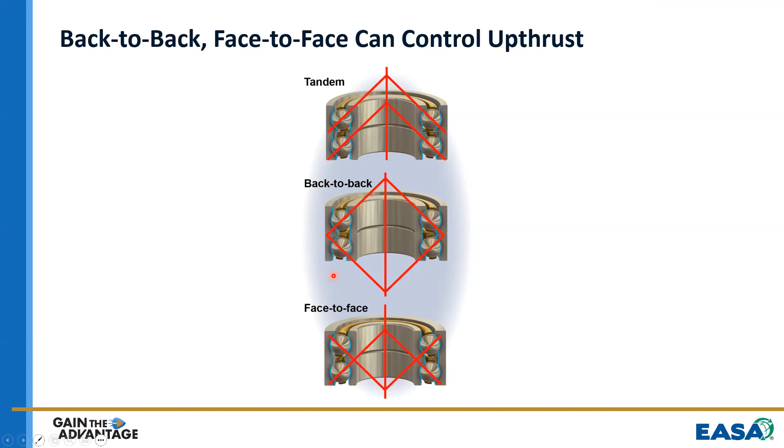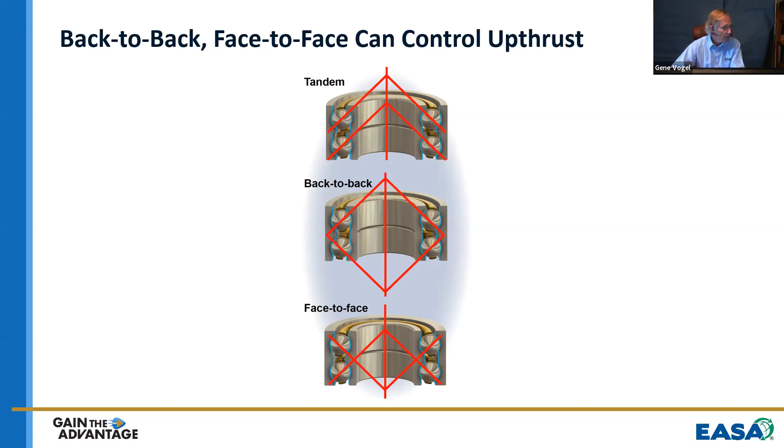Next question: is it only corrosion that causes dezincification? Yes, dezincification is a form of corrosion. Whatever the chemical is, and there's a number of chemicals that will do it, it really likes zinc, and it eats the zinc away. So you've got a chemical reaction between something in the pumpage and zinc. Chlorine is one of the things that will do that.

Next question: what factors will decide which bearing arrangement to be used, face-to-face or back-to-back? That's the same question as before, and the answer is it's the bearing housing and the shaft. Either the housing or the shaft needs to apply clamping to preload. If it's the housing, it's face-to-face. If it's the shaft, it's back-to-back.

And finally, could you repeat the tests that you recommend for the pumps? Which tests? Read the question again. It just says, could you repeat the tests, or all the tests, that you recommend for the pumps? Well, I'm probably not understanding the question, but pumps can be tested operationally by hooking them up and seeing if they pump water. If it's a submersible, you test the seal chamber with about 12 to 15 psi of air after it's been filled with oil. So there's probably some other type of test that he's asking about.

Okay, she is asking about this one. It just came in. Can shaft currents caused by VFDs work their way through to the pump and react to water chemical makeup or even mineral makeup?

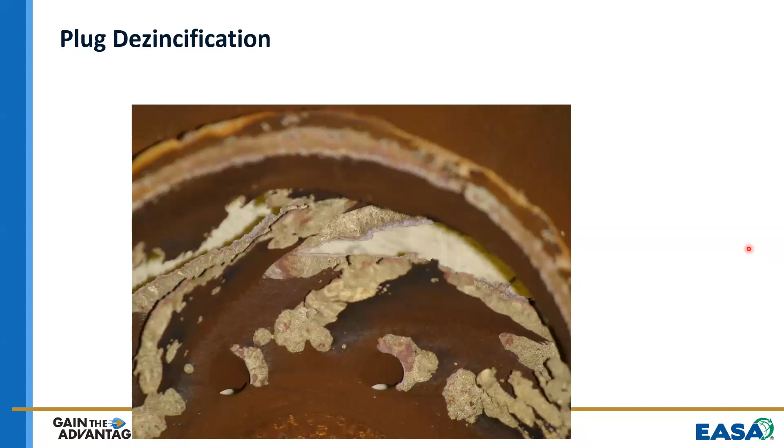Is a fire pump different from a standard industrial pump? Only when it's burning. No, the pump itself, they're not different. They paint them—some companies paint them red. But there's really no difference in the pump from a fire pump or any other. The regulations applied to fire pumps are applied by the local government authority, whether that's the city, county, municipality, or township—the fire department takes care of that. So it varies, and I couldn't say there isn't some location where somebody's got a regulation that tells you the pump needs to be painted red, or can't have this or that. They certainly could do that. There's nothing stopping them, but I don't know of any.

All right, that's it. Other questions? You're good. All right.